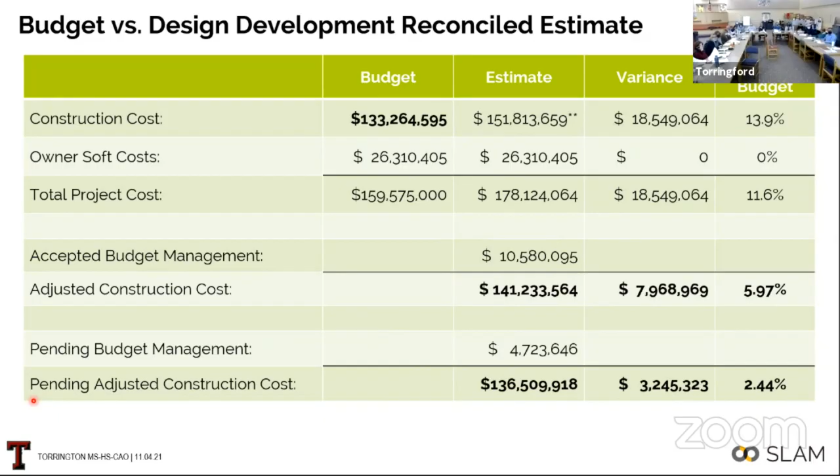Just so everybody's clear on what contingencies and escalation values are built into that budget: we have a design and estimating contingency of approximately 4% of the trade costs, equivalent to 4.6 million. There is still escalation built into this budget that will carry us out to the bid date of just over $3 million. And then there's a construction contingency that goes into the construction contract with O&G of 3.8 million.

That money is within the construction contract to deal with unforeseen issues as they arise during construction, for a total of just under $11.5 million of contingencies and escalation within those budget values.

So what that means is that the design and estimating contingency goes to zero as we get through construction documents and basically goes into the bricks and mortar construction. Similarly, the escalation values tend to reduce as we go toward CDs as well. But the construction contingency will pretty much stay as it is and be carried into the construction contract.

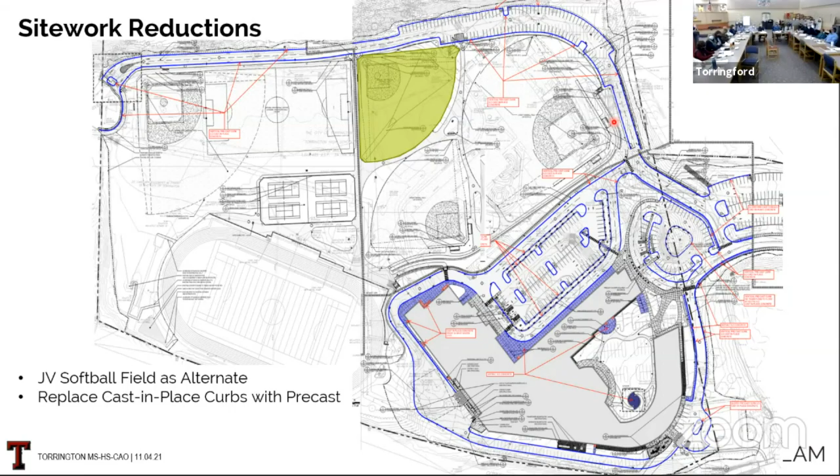Also, the other one is the parking at Besse. That's the next slide. Go ahead, Ken. A big savings is reducing the amount of work on that existing parking lot, instead of adding islands, changing the configuration, and connecting it to the new roadways. If you click again, I think we have a plan of the existing condition. So what we'll do is reuse the existing parking lot without any improvements, although we'll still participate with the city to move the skate park. So we'll gain some location for parking, but not improve the parking.

And still close off that little section? That wasn't discussed, but you're right — as part of the original design, we were going to close that off. I think we can still do that. Yeah, I think that's important. Sure.

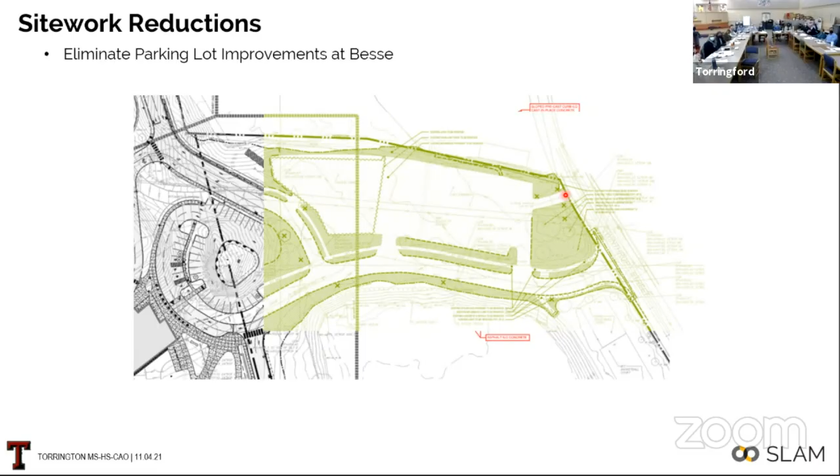Not sure this is appropriate for right now, but if I don't ask it, I'll be sad — the two beautiful trees lining the current road, are those trees going to be victims of any of this? We did meet with the public safety officer who's in charge of traffic, and there was discussion about which trees to save on this island. Is this where you're talking about? I think it's more along the route into the building — there are about four trees, pretty mature, nice trees. I see two that are being taken out.

We also have a provision in our specs for an arborist to come out. If we recommend saving a tree as part of the site work package, an arborist will have to come out and make sure it's healthy enough to save. We'll recommend which ones get protected, not only to comply with your planning and zoning regulations, but also because we're always looking to add green to the site. We'll try our best to save anything that's healthy.

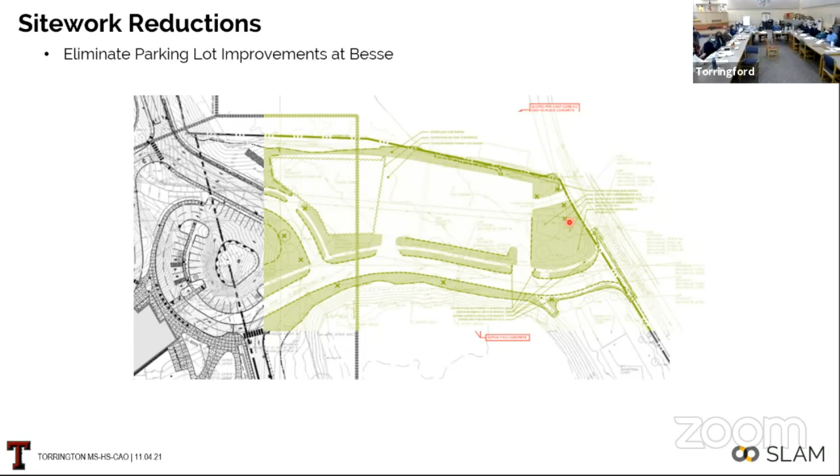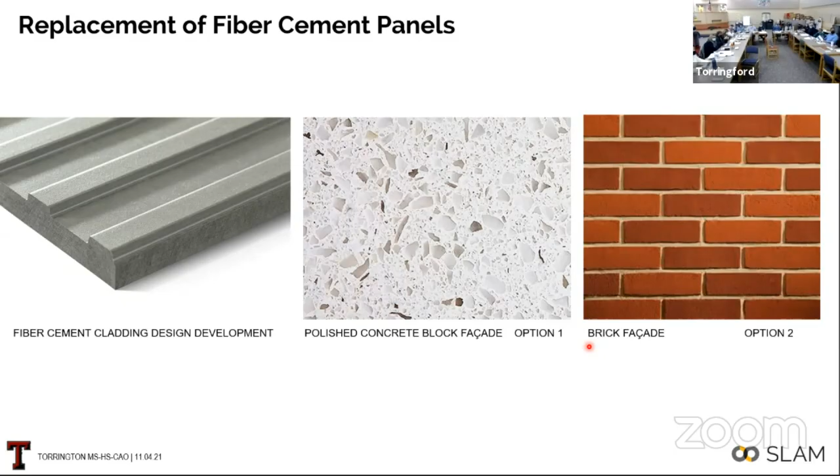Next slide - you'll see the layering there. This is option one, the ground face block we were describing. The major difference is that with the ground face block, you're distinguishing the volume of the gymnasium and this area from the rest of the building, because it's a very big building and it's important to break it down in scale. But brick also looks good and can make it more coherent - we'll still look at those alternatives, but both are saving us a lot of money.

Option two is using the same brick that's everywhere else on the building for this portion as well. Is that still a $1.9 million savings, or does it get more or less? We didn't check that pricing for going to brick. Brick is $3 or $4 more per square foot than block.

The last estimate had another line that said replace the cladding with insulated metal panel - that was less of a savings, and that's not acceptable. We did not look further at reducing to brick, because metal panel was $55 per square foot, and brick is $43 or $44. So the savings would be slightly less going to brick, and a bit different going to the ground face block. Going with the polished concrete block is a savings of $1.9 million.

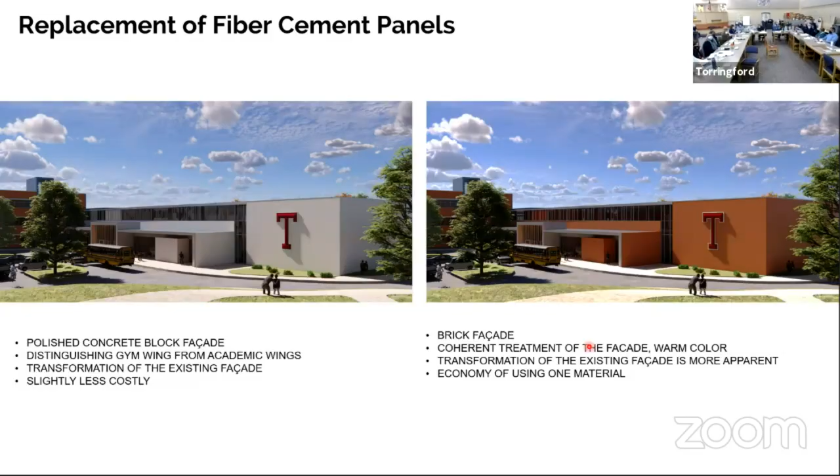So there's a series of images of the renderings that Julia updated. It's just a different aesthetic, but basically the same quality.

One of the items on the list was the T sign, because this is something that can be purchased later on, and it was also about an $18,000 item.

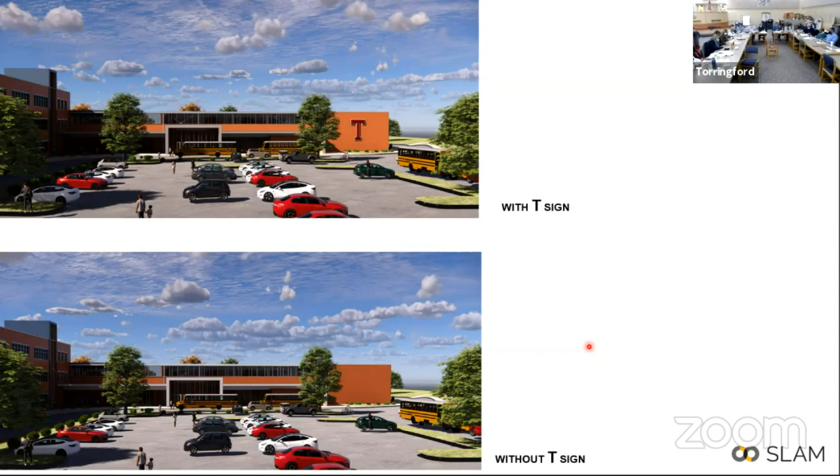Everybody has one, yeah, there it is. So it was a metal box, but large. Would it light up? No, it wasn't just metal, we would light it from the ground. So it's metal? Right, it's like a super large applied letter, like the applied letters at the media center sign, but this would just be your logo.

But that's cut out of the current plan? So that's a value management item we discussed and accepted for $18,000, because it's something that can be applied at any time later. We can include it in the documentation as an add alternate. If you have funding available, it'll be purchased, and if not, it's now a standalone item you could go to any sign manufacturer and have done separately outside of the project, probably for somewhat less, because the fees associated with doing it through the project might make it a little more expensive.

And like Amy said, it's something where if you want it to remain, that's a very easy add, one bite. Well, that looks like there's some 3D to it. No, it has a thickness to it, bigger than that. Way bigger, bigger than me.

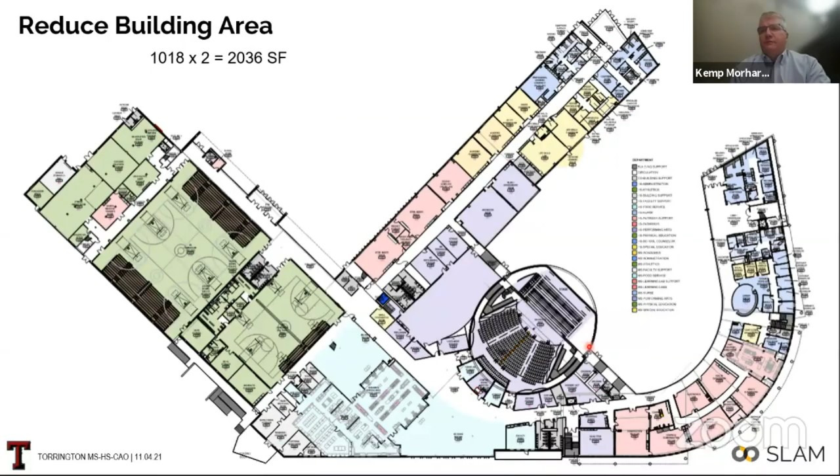Another way to save money is to cut the size of the building. While we'll be adding square footage for the auto shop and for additional needs for larger enrollment, we're also looking at ways to save money where we can. One way is to take this piece off the backside of the gymnasium that exists today. We think it will improve the look.

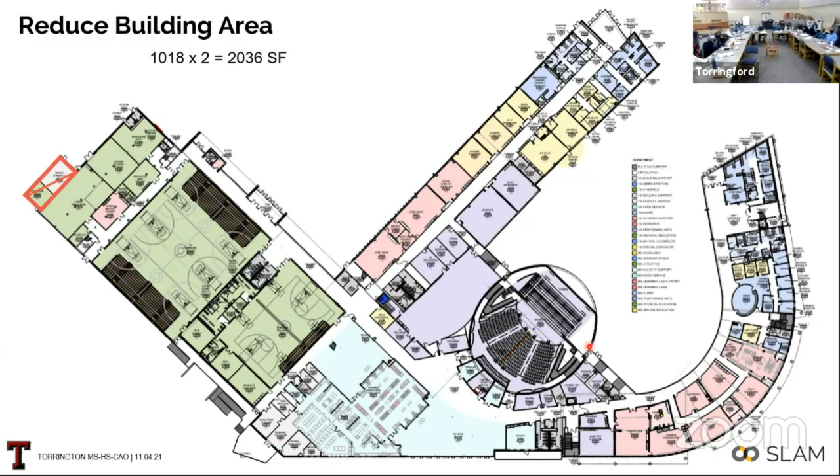It will make the renovated new gym and new locker rooms much more clean - you won't have this appendage attached to the backside. We were able to take this, which is a 2-story volume, and move the program areas we've currently got designed into this portion of the building.

On the next slide, it's a bit confusing, but the first floor is on the left. We're moving the outdoor vehicle storage to this location and moving the fitness center up - it's finished up on the page. The concession stand, which was on the lower floor of that area, is moving next to it, and is now accessible from indoors and outdoors.

Is that the only concession? Well, they'll no longer - so there was one outside, and didn't we have a small one inside? So we will not have another one. I think that'll be a problem only because you have different groups running concessions on the same night - football runs concessions, and volleyball runs concessions.

Not often on the same night though, do they? Yeah, we run a lot of Friday nights. Yeah, yeah. Well, we'll look at that.

Right now, that's not an ideal location for concessions for the inside anyway. When we met about this another time with the AD and with Mario, we talked about how it's maybe not ideal to have all the spectators come to that more private area near the fitness room and the trainer's room. So we'll continue to look at that - some maneuvering of program area we can still tackle as we move forward.

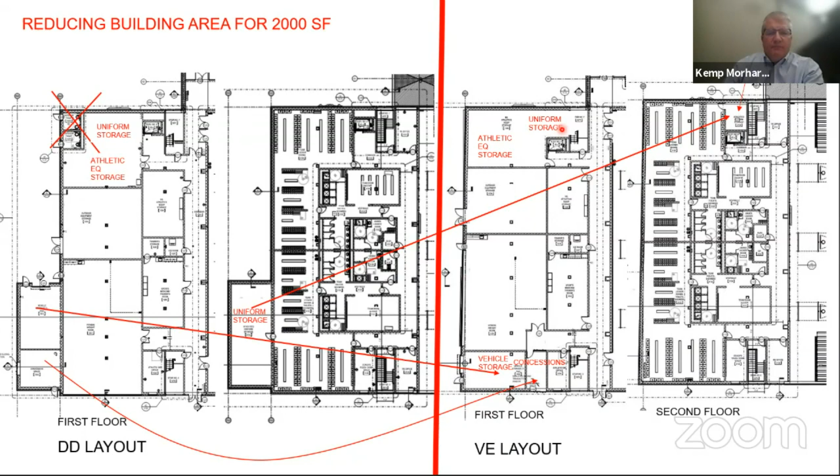Thanks, Kim, that's true. Okay, any questions about that? Okay, next.

So this is just another idea of where the auto shop can go. We talked a few meetings ago about putting it at the lower level, accessing it around back and coming in this area, over here. A new idea that Julia came up with, which is fabulous, is to put it at this end of the existing locker room area.

When we were trying to squeeze it into the lower level, it was a compromised space. We were limiting the area that was going to be a 2-story volume so that you could have the lift, but the remainder of the space would have still been shorter. So I think this gives more opportunity for that program.

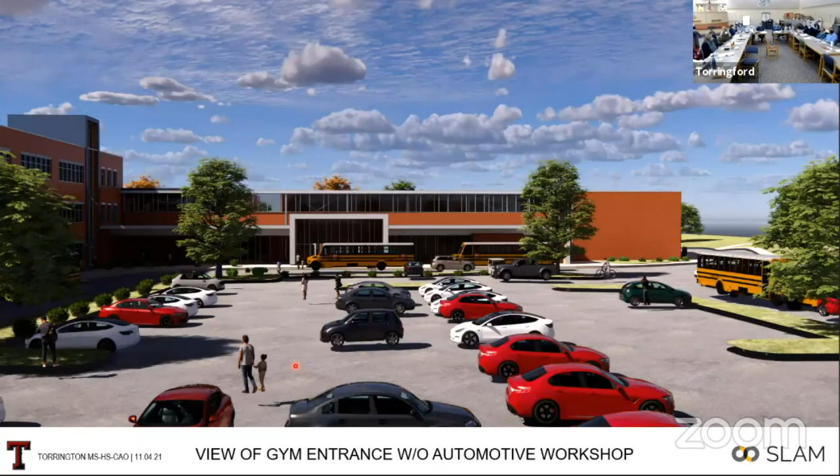So this is the look without it and with the structure. Let me do that again, because it's hard to see. So, there it is without it. And then, yeah, so it brings the building out further, but to Julia's point, the entrance would be around the other side.

What are the spaces next to it? That's your athletic equipment storage and outdoor athletic equipment storage. What if you flop those? Well, the auto shop can't go in that spot in any of the existing space, Mario, because it's only a 12-foot floor, and there's a lot of columns.

Roland made a good point too, that with consideration, you won't get that program until after the building - you won't get that program for another year, because we have to take the building down to make way for it. Right, that would be part of the phase 2 construction.

And they would have to go outside to get there? No, they could enter through the hallway - a person could enter through the hallway, but a car would have to go around.

No, it doesn't change the bus loop, but it changes the relationship of this drive that goes around the back and how it intersects with the bus loop. So it would come around a little bit further and intersect more like that. We just haven't drawn it yet, but we have studied it and it will work.

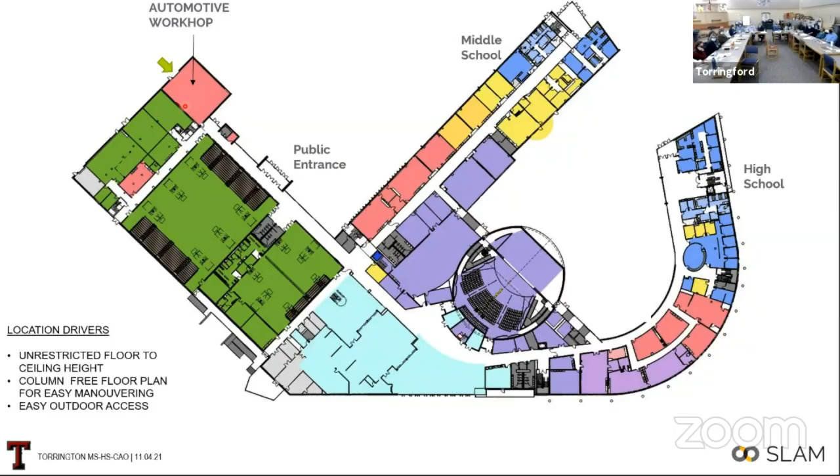It could go in the parking lot, but they'd see it. We don't want that. It could also go down in the loading dock area, like where the skate park is, tucked way in the corner. It could be moved up when they needed it. Someone could park it a long way there, but that's a long way to drag a car if it's not working. Assuming it's drivable, yeah.

So there would be enough room if someone towed a car there, enough room to be able to turn, put the car in and all that. Yes. This lane that comes around, remember, this accommodates a tractor trailer, and two-way traffic.

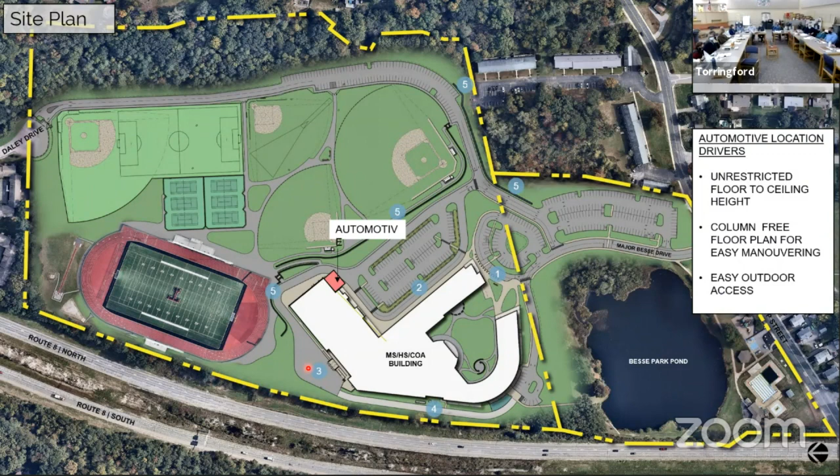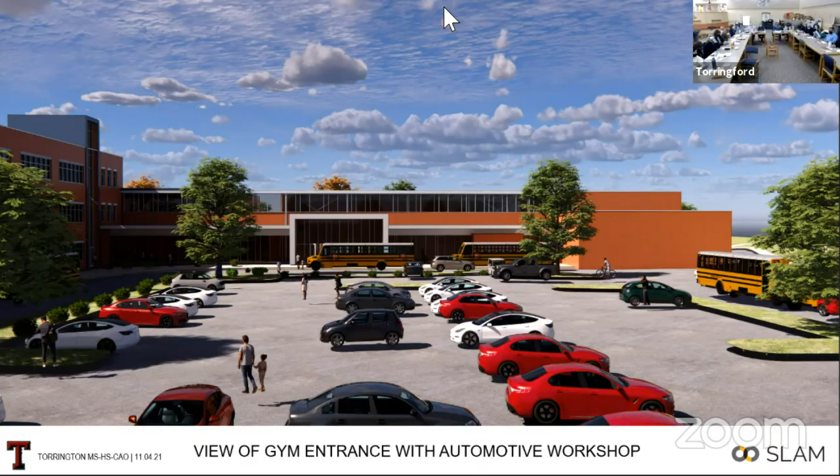I think that's it. I think this was the last slide. So just going over the next steps, we're gonna follow up with another meeting with the state, go over that enrollment with them, update them on the allowable square footage, and update them on the budget. So that's what we've been doing with the state.

The next thing is O&G construction career paths, it's the second page. Again, like I told you last time, David and I, and Marshall and Ruth, and Beth already met with Dupont HR, and this is their action plan proposal.

We're gonna meet next week to fill in the dates and go over all these items with the high school. So the overarching theme is just how many interfaces can we get with students throughout the course of the project, starting hopefully sooner than later. That'll paint the rest of the picture for what students are getting relative to entering a skilled trade through the union. And since we have the headquarters right in town, we'll have more accessibility, not just to the construction aspect, but all the other aspects of O&G, whether it's accounting, finance, or all those things.

So that's the intention. And this would be for seniors only? No, well, you don't know, I think those are really the details. There were some initiatives there.